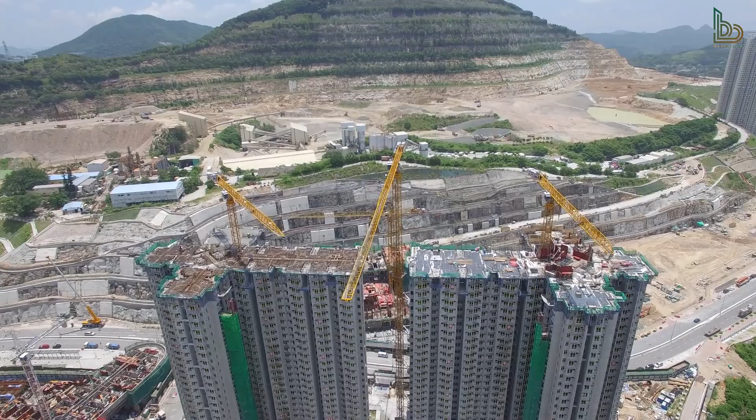Have you ever wondered how modern buildings are designed with such precision and efficiency? Or how architects, engineers, and construction professionals collaborate seamlessly to bring complex structures to life? The answer lies in Building Information Modeling, or BIM.

In this video, we'll break down what BIM is, why it's revolutionizing the construction industry, and how you can get started with it. Let's dive in.

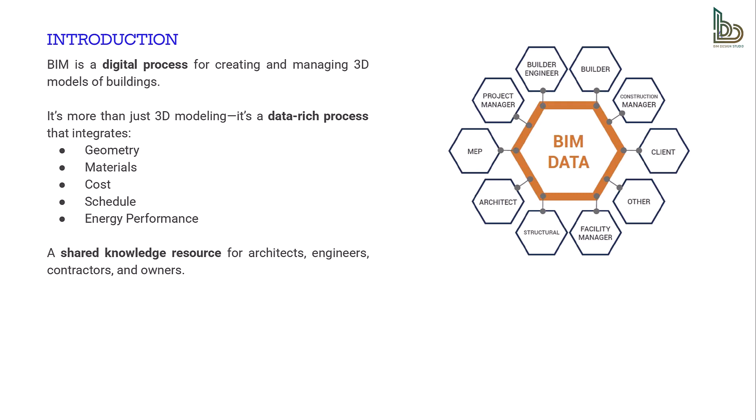Building Information Modeling, or BIM, is a digital process that involves creating and managing detailed 3D models of buildings and infrastructure. But it's not just about 3D modeling.

BIM is a smart, data-rich process that integrates information about every aspect of a building, from its geometry and materials to its cost, schedule, and even energy performance.

Think of BIM as a shared knowledge resource for everyone involved in a construction project. Architects, engineers, contractors, and owners can all access and contribute to the same model, ensuring better collaboration, fewer errors, and more efficient project delivery.

So why is BIM such a game changer? Here are a few key reasons.

First, improved collaboration. BIM acts as a centralized platform where all stakeholders—architects, engineers, contractors, and owners—can access and contribute to the same model. This eliminates silos and ensures everyone is on the same page.

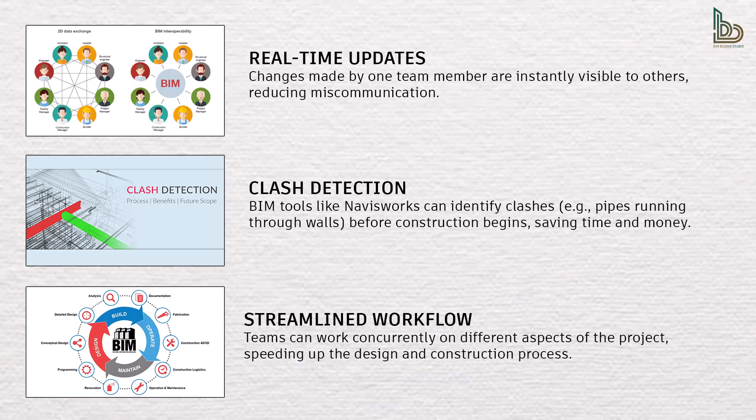The key benefits include real-time updates, clash detection, and streamlined workflow. For example, in a large hospital project, architects, structural engineers, and MEP engineers can collaborate on a single BIM model to ensure all systems fit together seamlessly.

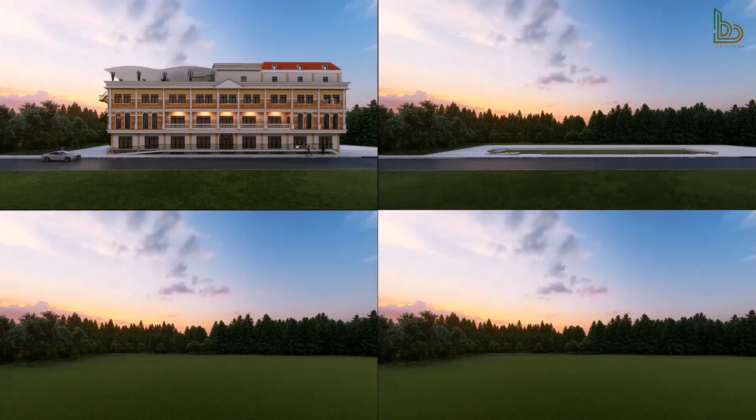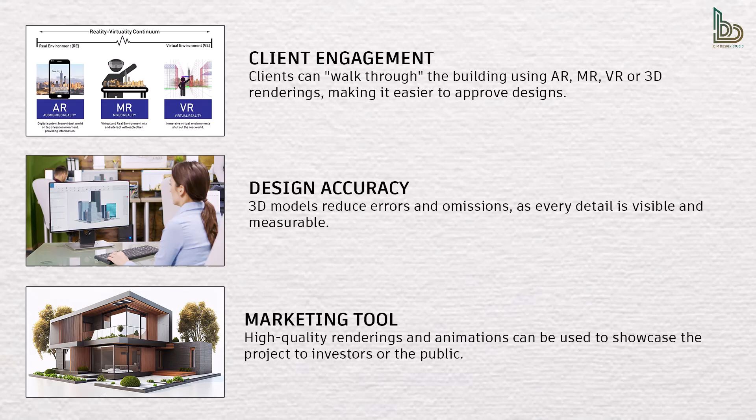Second, enhanced visualization. BIM provides 3D models that are far more intuitive and detailed than traditional 2D drawings. This helps stakeholders visualize the project before construction begins. The key benefits include client engagement, design accuracy, and marketing tools such as high-quality rendering and animation software.

For example, a developer uses a BIM model to create a virtual tour of a new office building, helping potential tenants visualize the space and make leasing decisions faster.

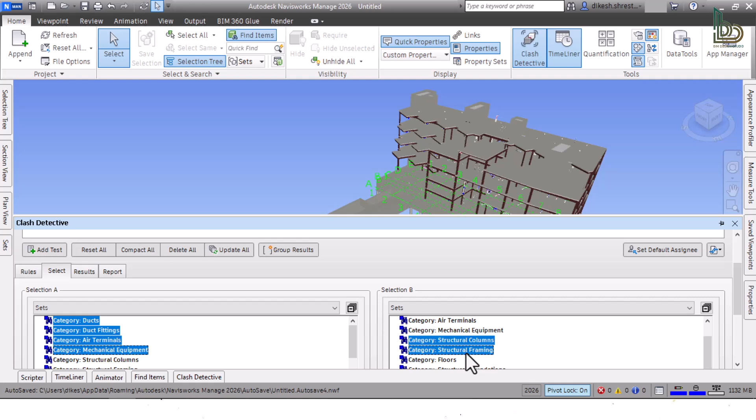Third, cost and time savings. BIM helps identify and resolve issues early in the design phase, reducing costly rework during construction. It also improves project scheduling and resource management. The key benefits include early error detection, accurate estimations, and efficient scheduling.

For example, a contractor uses 4D BIM to plan the construction of a high-rise building, identifying potential delays and reallocating resources to stay on schedule.

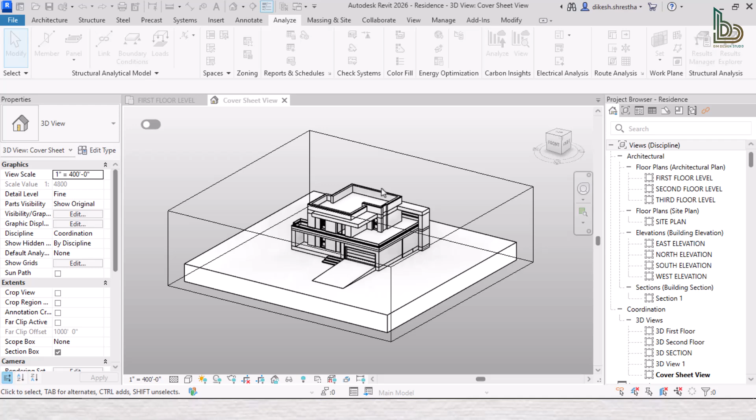Fourth, sustainability. BIM supports sustainable design by enabling energy performance analysis, material optimization, and life cycle assessment. The key benefits are energy efficiency, material optimization, and green certifications.

For example, an architect uses BIM to design a net zero energy building, optimizing the orientation, insulation, and HVAC systems to minimize energy consumption.

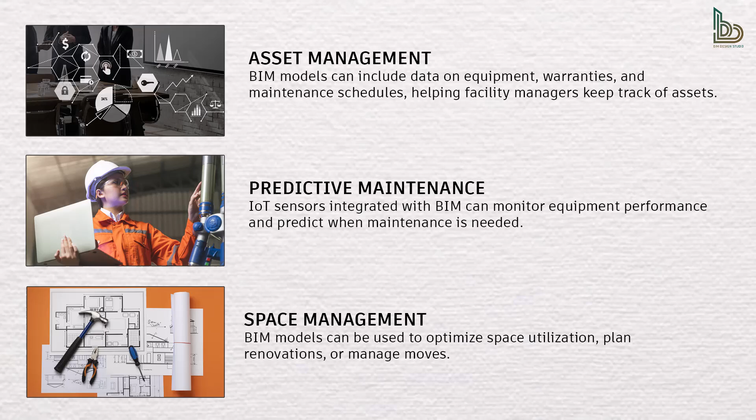Fifth, lifecycle management. BIM isn't just for design and construction, it's also a powerful tool for facility management and operation. The key benefits are asset management, predictive maintenance, and space management.

For example, a university uses a BIM model to manage its campus facilities, tracking maintenance schedules for HVAC systems and planning future expansions. In short, BIM is transforming the way we design, build, and manage structures, making it an essential skill for anyone in the AEC industry.

Building Information Modeling might feel like a modern buzzword, but its roots stretch back over half a century. It all started in the 1970s when researcher Charles Eastman proposed a groundbreaking idea.

What if he could store detailed information about every part of a building inside a computer? He called it the Building Description System. At the time, it was ahead of its era, long before today's technology could make it practical.

As computers became more powerful, the industry took its first big leap in 1982 with the release of Autodesk AutoCAD. Architects and engineers could draft digitally instead of on paper for the first time. It was revolutionary, but still limited to 2D drawings.

Then came 1987, when Graphisoft launched ArchiCAD. This was the first software that allowed architects to not just draw but build a virtual 3D representation of their projects. It marked the first true glimpse of BIM in action, even if the term wasn't widely used yet.

That changed in 1992 when a paper by G.A. van Nederveen and F.P. Tolman officially launched the term Building Information Modeling. It was the beginning of a new way of thinking, not just drawing buildings but modeling their entire life cycle digitally.

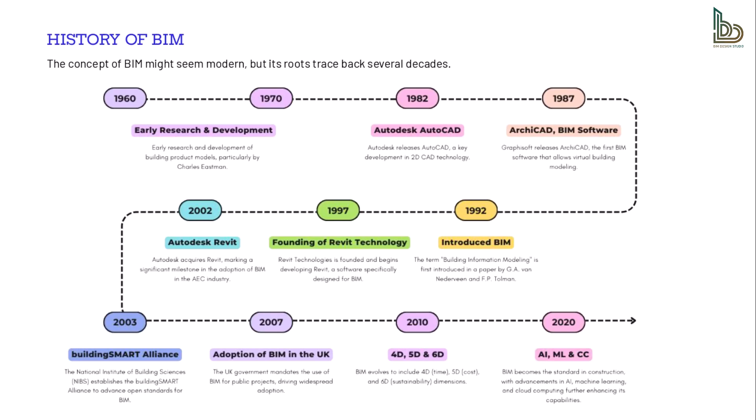We have come a long way from simple blueprints to intelligent, data-driven models that power the future of architecture and construction.

Whether you are an aspiring architect, an engineer, or a construction professional, learning BIM can open up new opportunities and help you stay ahead in your career.